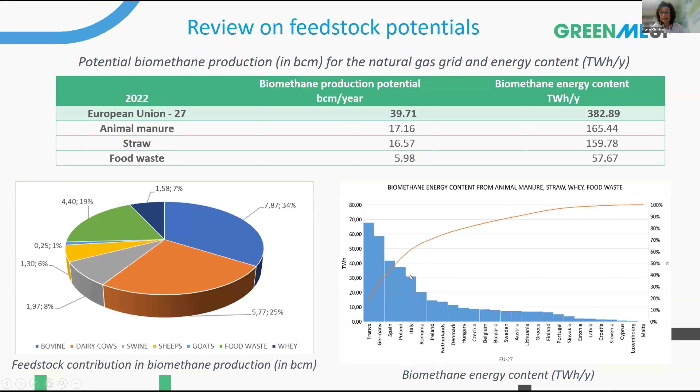Coming to the countries that are leading the way, first is France, that could produce something like near to 70 terawatt hours. Then follows Germany, and thereafter it's Spain, Poland, and Italy with the highest biomethane energy content.

The second objective is to evaluate those framework conditions in the target countries following the same methodology. First we had to identify and set up working teams in each country to be able to provide reliable data. Then we compile country reports on the production routes and uses, feedstock, and policy frameworks. That is already delivered, you will find it on our website. SWOT analyses are ongoing, and we are also starting the organization of business missions.

The third objective would be to actively engage stakeholders and the society, and have the societal acceptance. So, based on the stakeholders that we have identified in the previous work, we set up stakeholder hubs, something like working teams where people could come and provide their insights, but also take the results and use them in their own daily lives.

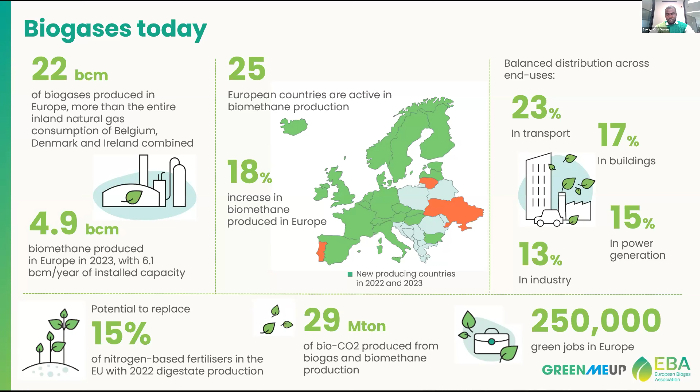But then again, with our figures, we also try to see beyond just EU 27. So in some cases, you see specifically for EU 27, and if not, then we are looking at the whole EU, more than the 27.

To date, we have the biggest growth in biomethane production year on year. As I mentioned earlier, there's 18% year on year growth in Europe, which is more or less 21% year on year growth even in EU27, reaching 4.9 BCM biomethane production within the EU27. And as I also mentioned, in the first quarter of 2024 already, we saw 6.1 BCM biomethane installed capacity. The countries leading this run are more or less Italy, France, Denmark, and the UK, and they are scaling up their biomethane production.

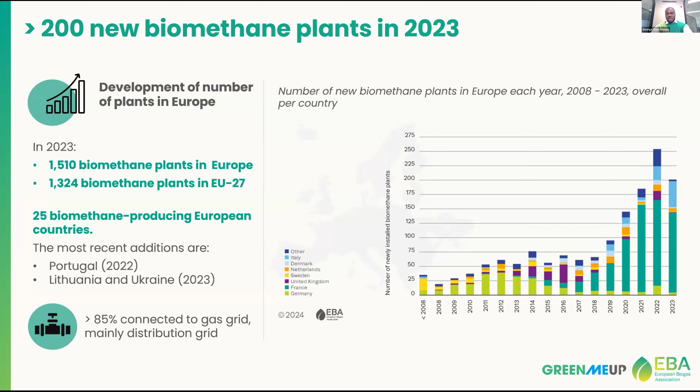In terms of end users, the biomethane being produced is used almost equally across all sectors, I would say. We still have quite a chunk unknown, which we keep updating, so the figure for 32% keeps getting smaller, but the majority goes into transport.

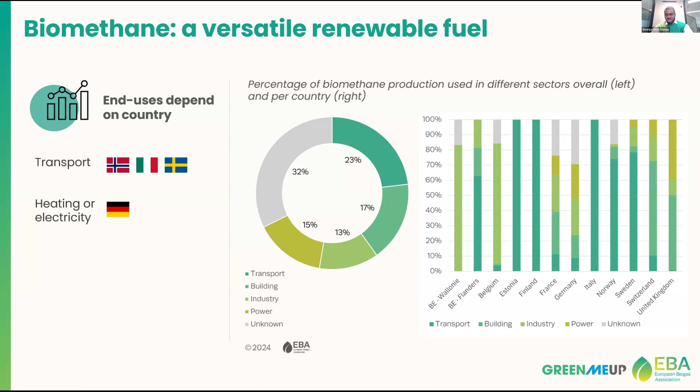Moving forward, we want to look at the potential of production. So now we've seen a bit of where we are currently, and then where we can get to in the next couple of years. There's already been a shift in terms of the new plants being produced, in terms of the main feedstocks being used.

We can also see that with this comes growth towards 2030. Currently, with studies done by other bodies, and also commitments made by member states through their NECPs, we can already see the projected growth.

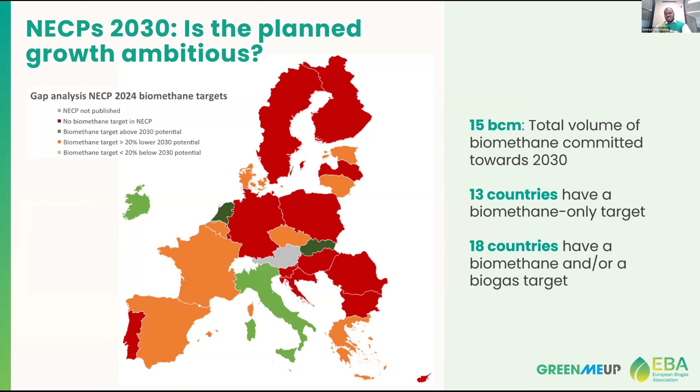However, towards 2040 we can also see there's still a lot of potential in terms of production. Within the EU 27 until 2050, we're looking at 151 BCM by 2050, coming from conventional anaerobic digestion and also thermal gasification.

We can already supply like 85% of the gaseous fuel demand in Europe, which will help us have a sustainable, secure energy production within the European market, balancing our needs and the challenges when it comes to waste management, emission mitigation, and affordability.

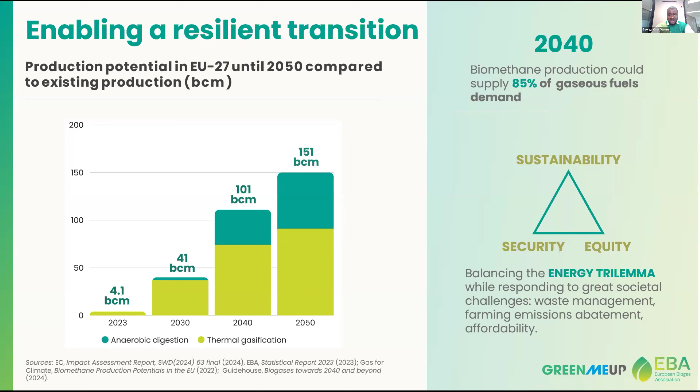Because whatever we are producing now is being used in Europe, we are not just solving waste issues, we are also providing other core products that can further be used in further production of biomethane, and even being used in other sectors such as agriculture—like digestates, for example.

And then there are other countries. As we have within the GreenMeUp project, we want to help countries like Latvia, Slovakia, Lithuania, and Estonia. The idea is to more or less transfer knowledge to some of these countries to build up their potential, so that at the end of the day, production across Europe increases for everyone.

So how then do we increase biomethane production? There are two major categories we'll look at: feedstocks and technologies. For feedstocks, we're looking at digestate from anaerobic digestion, which can be used to produce additional biomethane, either through hydrothermal gasification or pyrolysis in specific cases.

We're also talking about utilization of marginal and contaminated lands to produce bioenergy crops, avoiding competition with land use for actual food or feed production. And then we're also looking at seaweed, which we can invest in to bring up a sustainable feedstock for biomethane production.

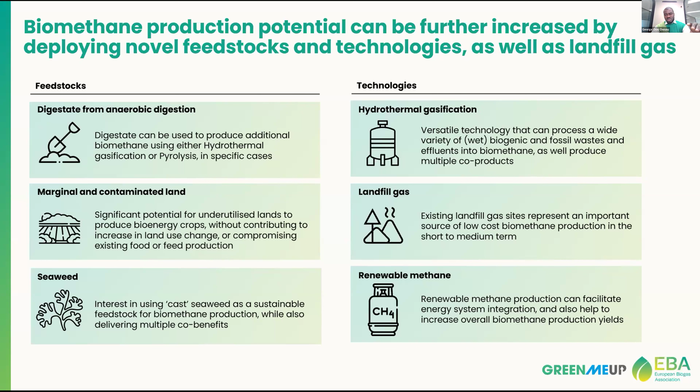So you can already see there is a lot of potential, and there's even more that we can do within Europe in terms of our action to increase our overall production.

Now, just to touch a bit on the methanation and then also on biogenic CO2 - these are the main points I'll talk on, and then we'll more or less have the end of this conversation for now.

Here we see that there's already an energy system integration where the biogas that we've produced can then be used again, helping to create a stronger connection between the electricity and gas grid - either using it for gas systems, for transport, or in the power system. What this solves is that excess renewable electricity can be stored in the gas grid in the form of e-methane, and you can also use it for hydrogen and biomethane production.

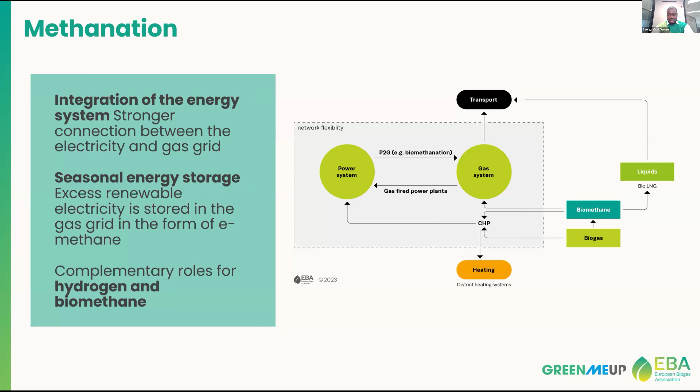Here we try to look at the state of the methane market, the e-methane market, mapping out the number of plants. We find that 10 European countries already have, or are expected to have, plants running by 2027, with growth expected in France, Finland, and Germany.

What's interesting is that you can already see a fast growing market in terms of the number of plants, right from 2015. Currently we're in 2025, and you can see the potential all the way to 2027. Most of them are coming from countries like Germany, France, and Finland.

These new plants are going to come in, and we're going to see the number of plants increasing. This also means additional production, with some 3,000 gigawatt hours of e-methane by 2027. In terms of production, it's even steeper than the number of plants increasing - currently we're around 20, but by 2024-2025 we should see around almost 500, and all the way to 2027 we see like 3,000 gigawatt hours.

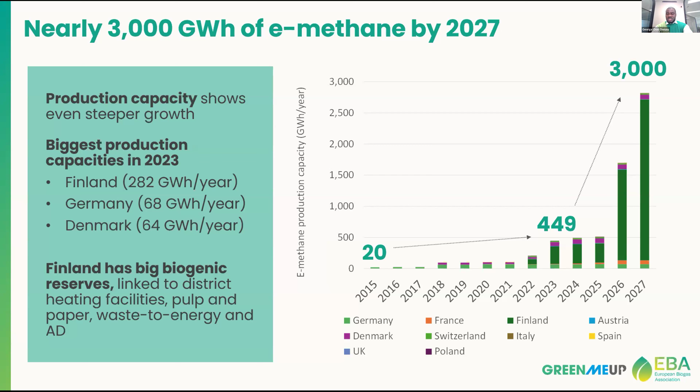Finland actually now has the biggest biogenic reserves, which is linked to their district heating facilities, and also waste to energy, as well as anaerobic digestion.

Then the next thing is biogenic CO2 - the potential that comes from biogenic CO2. Currently today we have 29 metric tons, but we can go all the way to 215. This will mean we're replacing fossil CO2 and making a more sustainable and circular alternative, leading to negative emission footprints, which is more or less not possible when doing it from fossil fuels.

Here the interesting thing is the end users for the biogenic CO2 we'll be able to produce, where we either use it directly or use it in a form of conversion. Whether you're using it directly for yield boosting in greenhouses, for heat transfer in refrigeration, as industrial solvents, in the food industry, or it comes under fuels where you're producing synthetic methane or biomethanol, or using it in the chemical industry, or even in building materials.

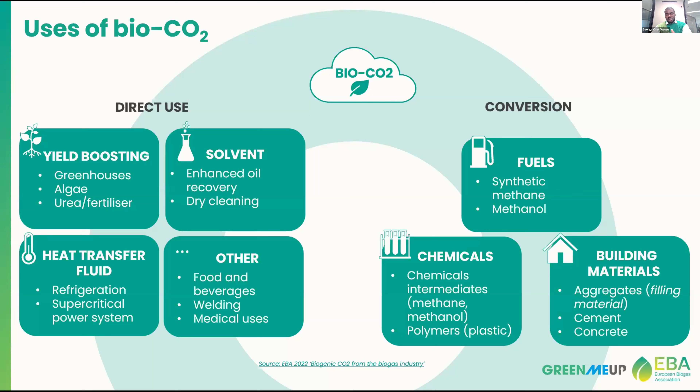So there's a vast potential to capture and use the biogenic CO2 that we produce as part of the biomethane production process.

Here we also try to see the plants and how the market is faring. But this work was started in 2023 at EBA, and the numbers we had at the time when we got this response seem to be a bit far lower than what's actually on the ground. So work is still in progress to update these numbers.

We already see that we identify 25 bio CO2 plants in Europe. But once we got further information regarding the plants, we can already project that there are about 67 already in Europe, producing way more than the 189 kilotons of biogenic CO2.

But then we can also see an additional 42 plants that are expected by 2027. And most of these plants are already using or are going to use agricultural residues, talking of the shift towards new feedstocks or more sustainable feedstocks. And then several countries are also now developing support schemes to promote carbon capture and utilization, and so you can already see that there's now also a growing demand for the use of CO2 even across Europe.

Now, finally, how to boost the scale up. And this will be my final slide, but I think Missini also touched this with some policy recommendations. So from an EU perspective, a more solid and consistent regulatory framework is going to be something that we'll need, to encourage sustainable biomethane production in compliance with RED III, with access to sustainable financing and the EU trading system, and also to facilitate the grid connection and cross-border trade for biomethane.

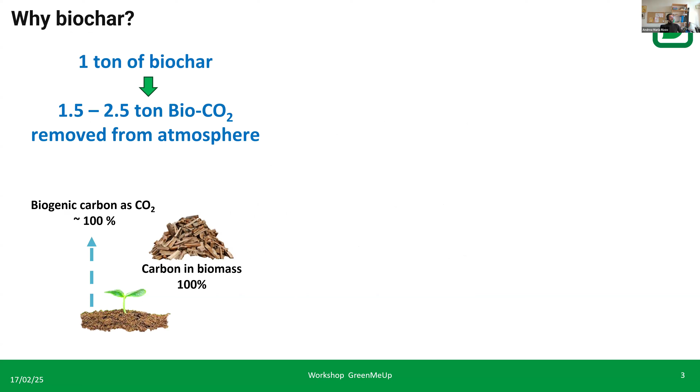So why biochar? First of all, we love biochar because, conversely from the labile carbon we find in biomasses, the process of pyrolysis produces this stable form of carbon, a long-lived form called inertinite. Now we have evidence from very long studies on its stability, and we can safely say that with this kind of process, approximately half of the carbon stored in the biomass can be transformed into a very long-lived form, and this can generate opportunities for carbon credit besides the opportunities that biochar has in the fertilizer space.

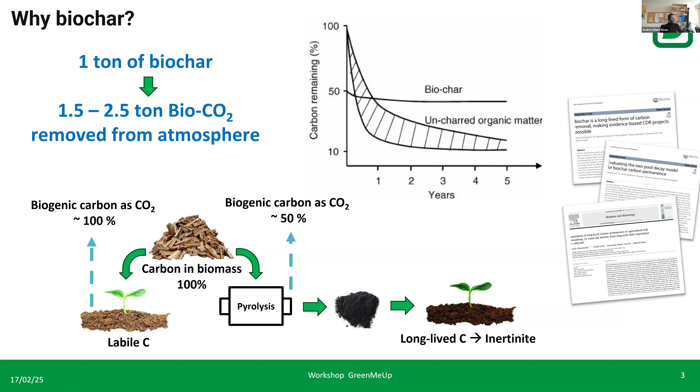Let's have a look now at the back-end integration of an anaerobic digestion system as we know it, and pyrolysis.

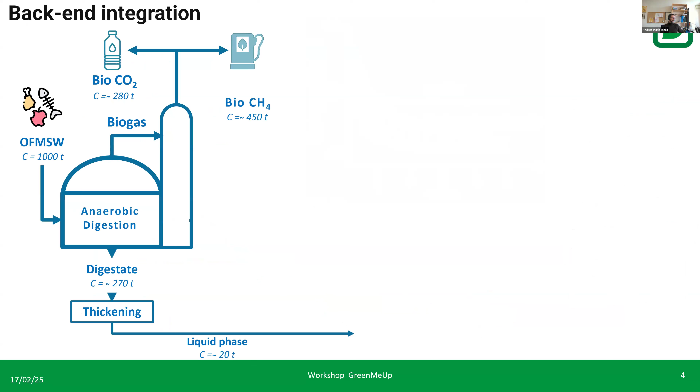So the digestate is normally thickened, separated into a liquid phase, which can be further stripped to produce ammonium sulfate. This is standard practice in many plants. And then we have our solid phase, the solid digestate, which per se, under appropriate conditions, can be component material category 5 under the fertilizer regulation, which is already a product.

But sometimes we add green waste to the stream. We go for composting and produce another kind of EU fertilizer, CMC3. Now, instead of going this route, which entails significant investment because you need a lot of space and time, processing time for composting can be in the tens of days.

Well, again, if we're still leveraging the addition of green waste, lignocellulosic biomasses for example, we go through drying and pyrolysis instead. We can combine the stripping section, because we can feed it also with the condensate stemming from the drying stage, and the solid product from drying can then be processed into slow pyrolysis.

This originates CO2 from the pyrolysis gas combustion and biochar, which is a European fertilizer under the delegated regulation 2021-2088, and per se is a CMC14.

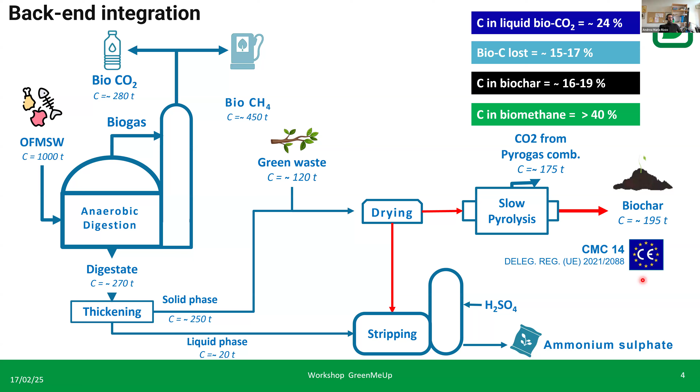Conversely, with biochar, under appropriate conditions, you can get up to 250 euro per ton. Besides, biochar opens up the possibility of carbon credits, which, as far as digestate is concerned, is not possible under that specific route.

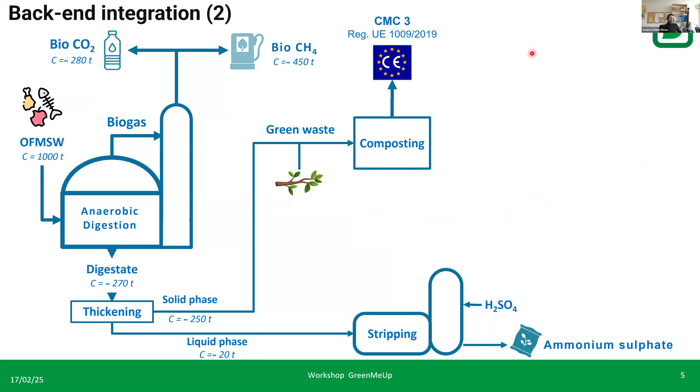But let's look at another kind of back-end integration with the pyrolysis system. If we look at the option where composting was part of the process flow diagram, with solid digestate co-composting along with green waste, we have the possibility to add more green waste and use a split stream of the solid phase, which undergoes the usual process and then passes through slow pyrolysis, originating again biochar and CO2 from pyrolysis gas combustion.

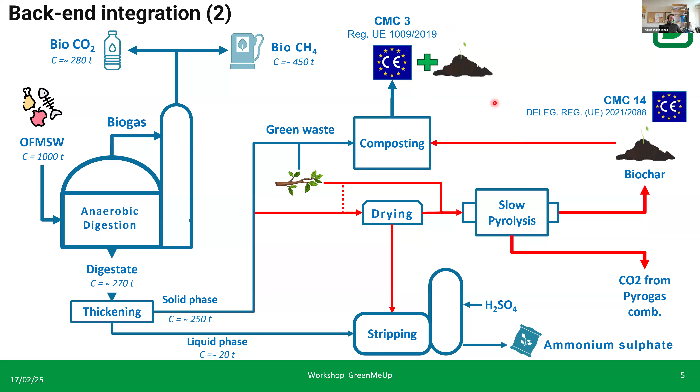So we have both products in this case, our CMC14 and our CMC3, but we also have the possibility to feed either part or all of the biochar produced to the composting plant, originating a biochar-added compost from the digestate, which has significant improvements in decreasing nitrogen emissions to the atmosphere during composting, enriching in stable solid carbon—contrary to the biochar's very stable carbon form, the CMC3—and speeding up the composting process, providing co-benefits to both systems.

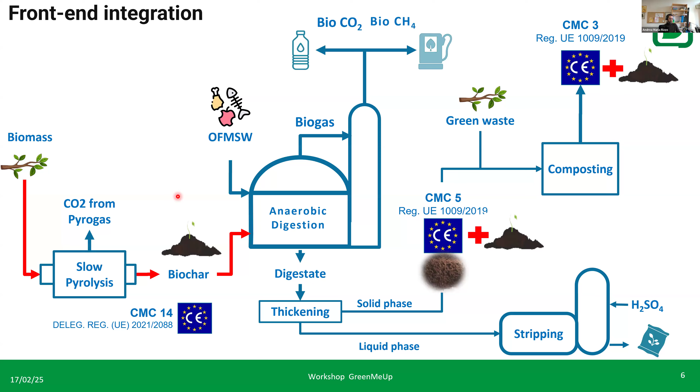Let's move on now to the case studies I was mentioning before, most notably this first one. This plant has been authorized in Italy, specifically in the Tuscany region, in 2024. It's the first of its kind in our country.

The project addresses the anaerobic digestion of roughly 40,000 tons of organic fraction of municipal solid waste, locally collected from separate collection—a very high quality product, but still affected by low appeal of the digestate produced—and some green waste. The plant is a conventional AD plant for biomethane production, and the biomethane will be fed to the local natural gas distribution network.

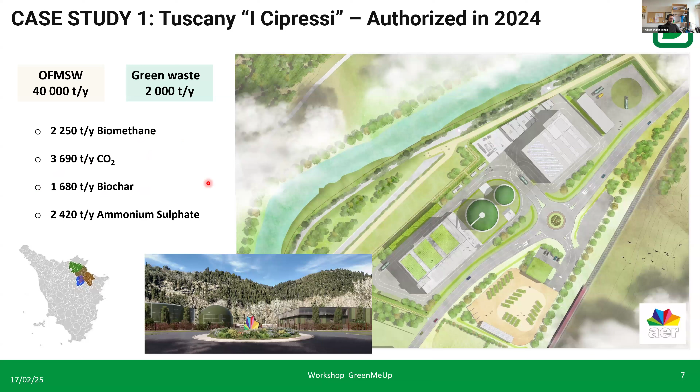CO2 will be separated and sold, and of course we will have also biochar production as mentioned, and ammonium sulfate. Now, a peculiarity of our country is that conversely from the straightforward schematic we saw before, in which after the drying stage we have a slow pyrolysis, the digestate, and green waste, and we produce the biochar out of it. We provide the heat for the process from combustion of the pyrolysis gas, which is standard practice when it comes to biomass. Being this specific plant processes waste material, bio-waste, as input...

National regulation in Italy requires that we do a thorough cleaning stage of the pyrolysis gases in order to avoid this stage of pyrogas oxidation being required to monitor emissions like an incineration plant. So it's a mandatory condition under our current legislative framework.

This requires that the pyrolysis gases are condensed before, separating the condensable part, which is sent to the wastewater treatment plant, whereas the permanent fraction of the pyrolysis gas, composed of CO, hydrogen, some methane, CO2, and other gases, is oxidated in a separate combustion chamber, and this stream provides the heat for the process. It seems a minor addition, just a small modification, but it's quite impacting when it comes to handling this product, which needs to be processed as a waste.

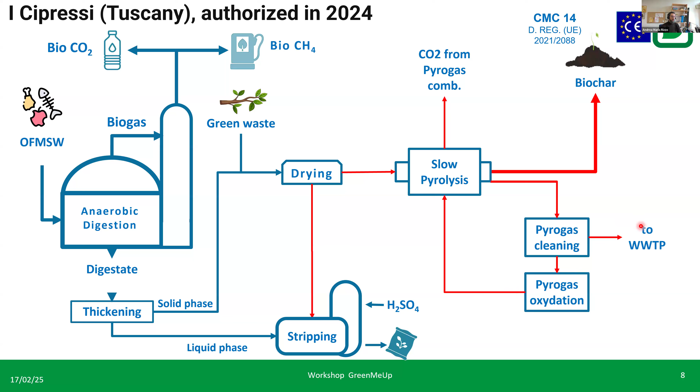The second example I'd like to bring to your attention deals with the island of Pantelleria, a small island closer to Africa than to mainland Italy. We have roughly 8,000 inhabitants on this island, but with a very big variation during the summer due to tourist influx. At present, the current scenario sees the island shipping all its bio-waste to mainland Sicily, having to deal with something like 7 hours of ship time to reach the main region.

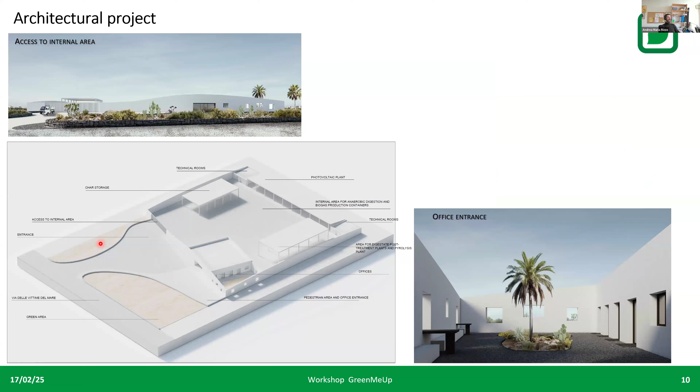In the context of Next Generation Europe, the municipality of Pantelleria secured funds to build its own organic fraction of municipal solid waste treatment plant, to be located on the island. We were contracted to produce the preliminary design for the construction of the facility.

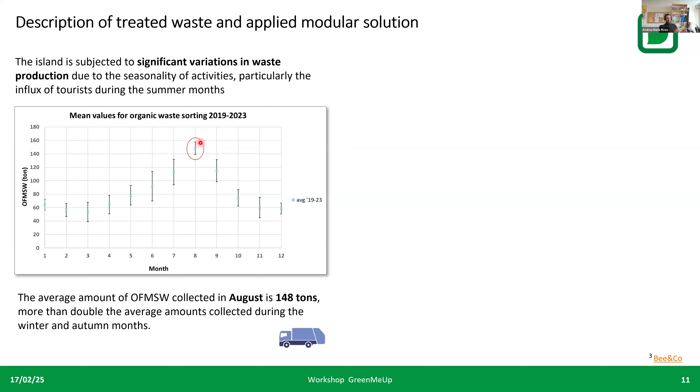This specific plant was quite a tricky case study to address, because the variation is such that in summer we have more than twice the baseline waste collection amount. Nonetheless, the plant is still a small one — roughly 1,000 to 1.2 thousand tons per year of waste. As you know, it's already difficult to make the economics work below 30,000 tons of bio-waste collected per year. This one was particularly challenging, but given the specific conditions of the present scenario, it's worth a shot.

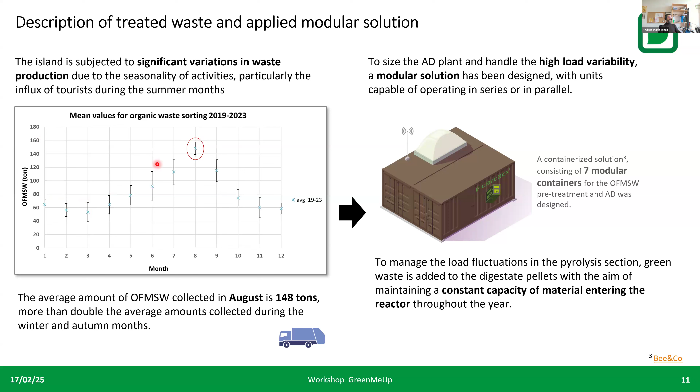In this specific case, we decided to use a very modular solution in which the reactor volume can be varied along the year to accommodate this large variation and manage fluctuations in the load on the pyrolysis section, which comes with this variable profile of bio-waste in-feed. We decided to make up this variation at the pyrolysis section with green waste, which is treated appropriately in increasing amounts during the valley of this curve, and in lower amounts during the peak season.

This specific pyrolysis unit is a small-scale one, a few tens of kilograms per hour, and it's an electric unit, along with the drying system. The drying is a heat recovery drying system, electrically driven, where the liquid is condensed after the evaporation step.

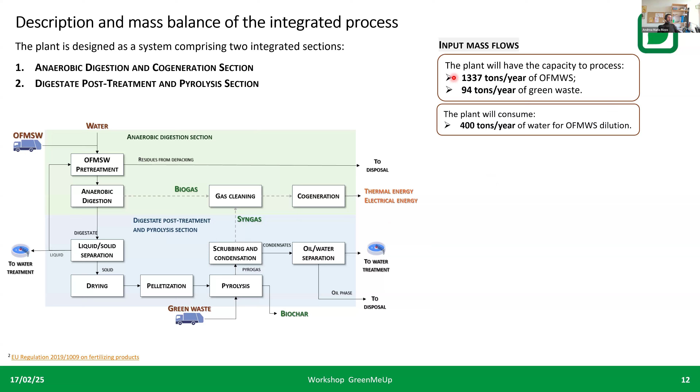So again, we have roughly 1.3 thousand tons per year of bio-waste, and approximately 100 tons per year of green waste. We will be producing roughly 300 tons per year of biogas and syngas, and something less than 100 tons per year of biochar, which will be used as soil amendment locally on the island of Pantelleria.

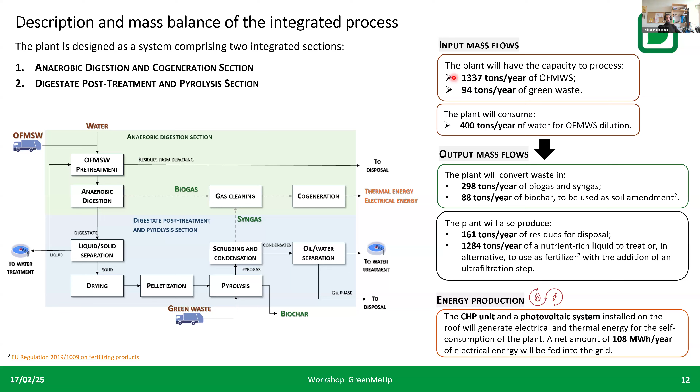The energy production in the system, we have a PV system that can combine with the CHP unit. The whole plant will be a net producer of electricity for the local grid, which at present is very polluting because it's not connected with the main Italian grid. So it's a standalone system operating on diesel fuel, and the whole island is powered by some cogenerators running on diesel. So it was a very important objective to make this waste treatment station self-sufficient and capable of producing a net amount of clean energy that can be delivered to the local grid.

Let's move on to the very last step of this short presentation. I'll mention the work that my colleague Leonardo Nibi is doing on bioenergy carbon capture and sequestration, and grid balancing, because in general biogas systems have the possibility to provide a platform for additional carbon capture and sequestration. Specifically, when we look at a typical biomethane plant, where we already have sizable CO2 production, normally we also have some cogeneration step, even if sometimes it's just to power the utilities of the system and cover the electricity demand from the plant itself - the self-consumption - which is sizable if we have a gas compression or cryogenic separation stage. In this cogeneration step, we will ultimately have some CO2 emitted as a result of the electricity generation.

Now, in a biogas plant, clearly this possibility can be leveraged to increase the share of CO2 at the output by treating also this exhaust stream coming from the CHP stage, along with the main CO2 stream coming from the separation of the biomethane from the biogas.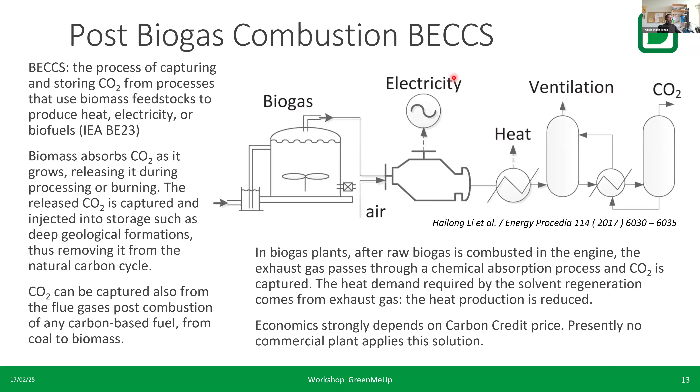Another option for which anaerobic digestion systems can be leveraged is the provision of grid balancing services, provided - and this is, let's say, a future-looking, forward-looking possibility. There are several potential areas of intervention, and I'm talking specifically about AD systems connected to CHP generators, which represent a sizable amount of power currently being produced in the EU.

Although there are some constraints, AD systems currently have the unique possibility that by having a certain amount of gas storage on site, they could potentially provide grid balancing services by pooling together multiple plants. If we look, for example, at the case of Italy, we have a very large number of plants operating up to 1 megawatt electric power, which is roughly 1/10 of what would be needed to provide effective grid balancing services.

But this is not an obstacle per se if we think of the possibility of having multiple 1 megawatt systems pooled together in a virtual power plant, thus providing the actual firepower to deliver this kind of service on the market.

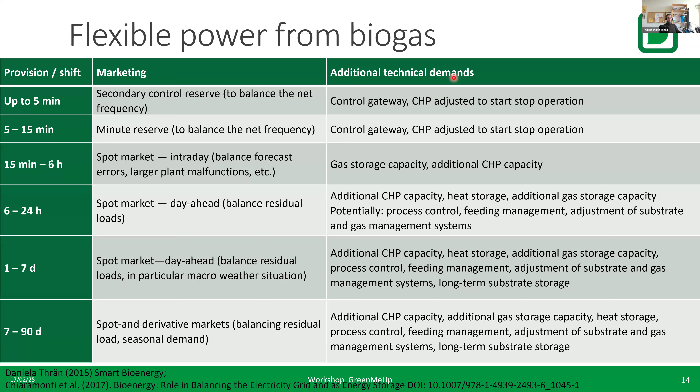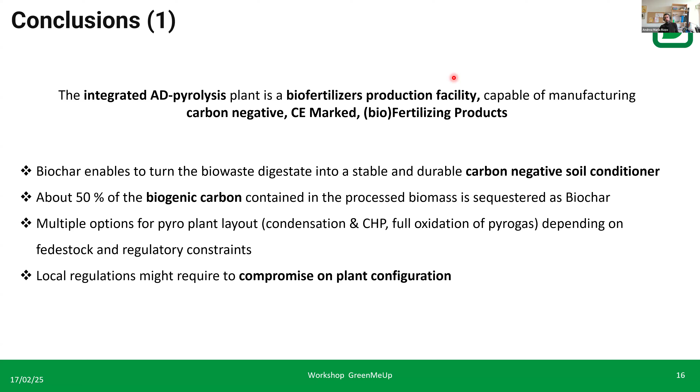There might be cases where local regulation requires compromising on plant configurations to abide by specific requirements. When added to the back end along with composting, biochar and a pyrolysis plant can reduce nitrogen emissions in the composting stage, increase composting speed and product quality, thus increasing value and reducing costs. When added to the back end instead of composting, the pyrolysis plant reduces the civil works of the whole plant, because you get rid of the composting stage, increasing the value of the product a lot.

Again, we're talking of 1 to 5 euro per ton for the digestate, up to 200 euro per ton for the biochar, and this opens up carbon sequestration opportunities. When added to the front end, you can improve the CH4 yield, thus increasing revenue, and produce a biochar-enhanced digestate or compost depending on plant configuration, thus increasing the value of the product itself.

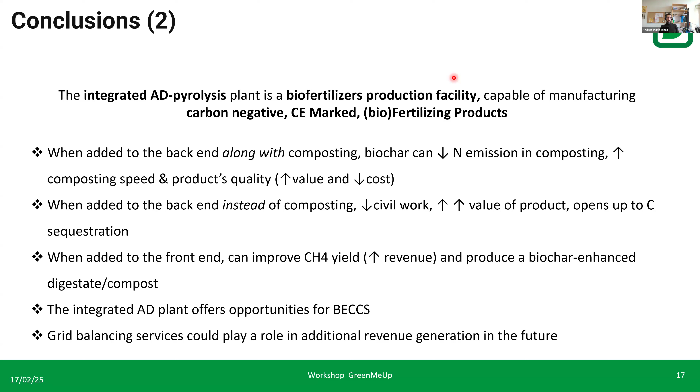The integrated anaerobic digestion plant offers opportunities for bioenergy carbon capture and sequestration, and of course grid balancing services could play a role in additional revenue generation in future scenarios. So thank you very much for your attention and for your time.

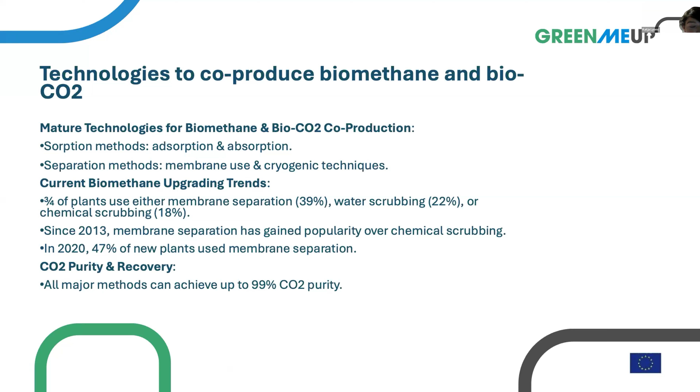Of course, it depends also on country regulations of CH4 concentration going to grid, and what technology we're using—PSA, water scrubbing, or amine-based technology—but they all have major features and can achieve up to 99% CO2 purity.

This slide shows that membrane separation has really ramped up, especially from 2013 onwards, even stronger. Cryogenic separation is very interesting, but is still a little bit energy intensive due to the refrigeration needs. But there are also some possibilities to make that more energy efficient.

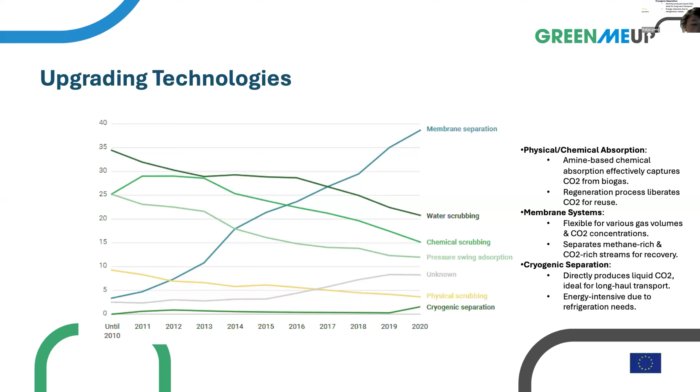The main advantages of biogenic CO2 separation in the upgrading process is that it has a premium image. The biogenic CO2 has a strong value chain compared to fossil-based—some markets up to $1,000 per ton of biogenic CO2. From the technical perspective it has high purity, more than 98%, meeting safety standards for food and beverage industries or for fuel technology.

So very low NH3 and H2S concentration, which is typically removed in the upgrading process or even prior to that with low-cost biological desulfurization, which happens in the reactor with injection of air or oxygen.

Then we definitely have economic advantage when we can locally produce it and co-locate these other add-ons and building blocks of fuel production to the AD plant and upgrading plant, to have all the important commodities as close as possible together. That means programmable production and secured supply options.

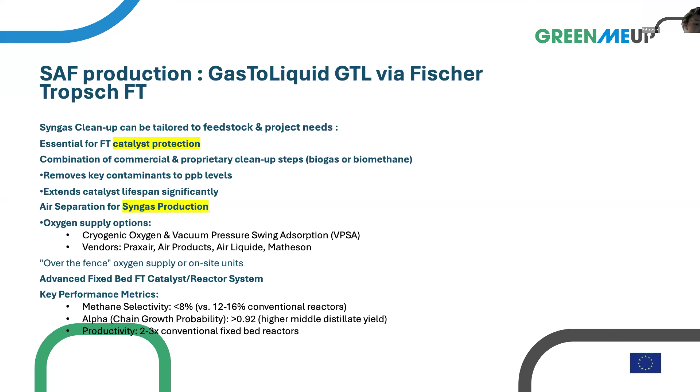Then normally you could technically just use the biomethane and add oxygen, and create, in the Fischer-Tropsch process with the catalysts and hydrocrackers, SAF or renewable diesel.

But you can make this more efficient and increase your yield output of SAF or renewable diesel if you use the separated CO2 in combination with hydrogen and send that into the same GTL trains to produce more SAF and diesel, almost by 50%.

So interesting is that this hydrogen would normally be created through electrolyzers. Maybe we can explain what we can do to make this more energy efficient.

There is a company in Austria doing green hydrogen plasma dissociation, which is an alternative to electrolyzers. This green hydrogen process is basically like a pyrolysis process in which we rely on renewable energy, which can be biomethane as a feedstock, and also biomethane as renewable power. It's cheaper and more efficient than conventional electrolyzers.

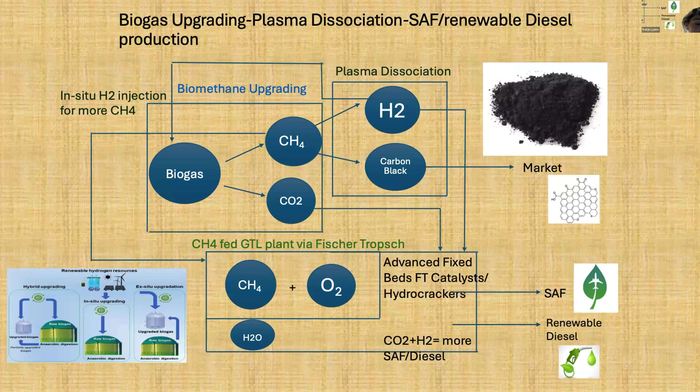At the same time, how is this done? It's a plasma arc that breaks the methane without combusting it entirely, avoiding CO2 emissions. Thermal energy is created, which has another use for other applications.

For example, it could be turned into cooling for the absorption process, if you need cooling for the CO2 that we initially separated from our upgrading process from the biogas.

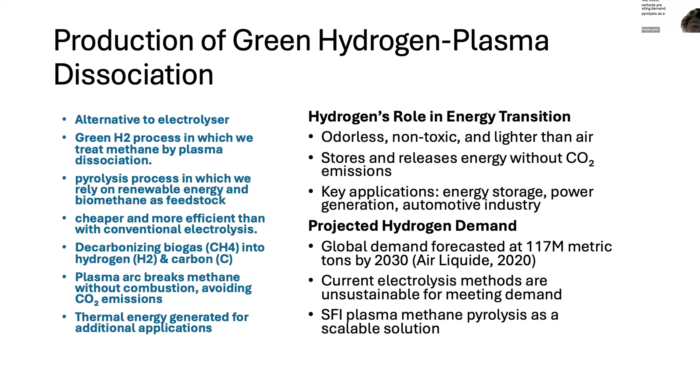Maybe what's interesting is that Air Liquide has forecasted a global demand of 117 million metric tons of hydrogen by 2030, and current electrolysis methods are really unsustainable for meeting this demand. So this could be an interesting and scalable solution.

Why? Because to produce 1 kilogram of hydrogen, with a caloric value of 33.3 kilowatt hours, electrolyzers require about 53 kilowatt hours of electricity. And this 1 kilogram of hydrogen, when converted back into electricity by means of a fuel cell, for example, yields 25 kilowatt hours of energy. So this is an energy loss of more than 53%.

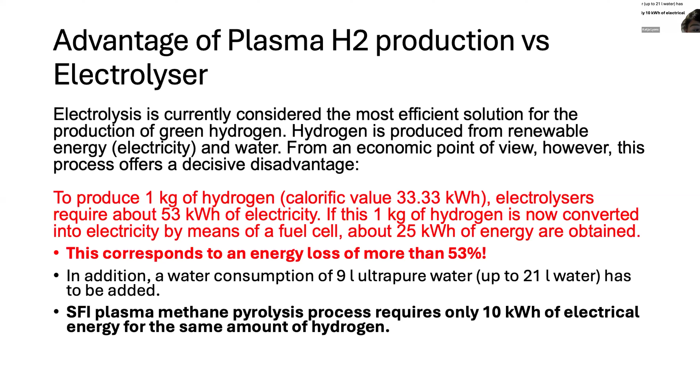Also, you need a lot of water consumption, from 9 liters up to 21 liters of water. This SFI plasma methane pyrolysis process requires only 10 kilowatt hours of electrical energy for the same amount of hydrogen produced. So this is very, very interesting.

So the key takeaway from the SAF production is that we can do GTL via the Fischer-Tropsch process. We can produce a direct drop-in fuel, which, with the European mandate starting from 2025, is at 2% as a blend-in fuel to fossil jet fuel, and by 2050 it will be up to 70%.

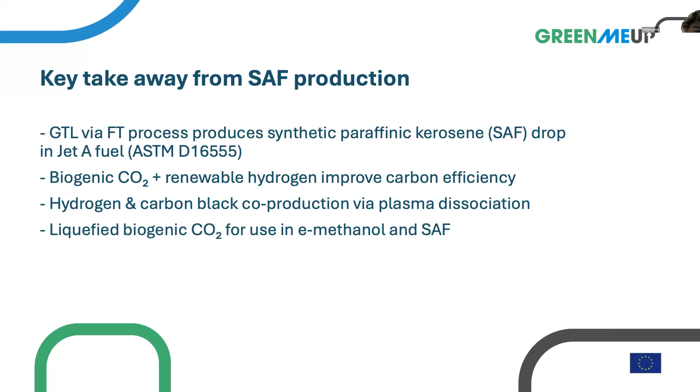So this is a very aggressive target, and in order to meet these targets, we need to be producing SAF better yesterday than tomorrow, and it's hard to do it with only the waste streams that are given. So what we can say here is that we have to look into the feedstocks.

It has been mentioned in a few presentations today that feedstocks, food waste, industrial organic waste, and energy crops will be interesting. Still untapped and unutilized is high lignocellulosic biomass - straw, husk, pulp. The challenges lie in these complex cell structures that require special pre-treatment, and also investment in tailored equipment for these co-digestion techniques.

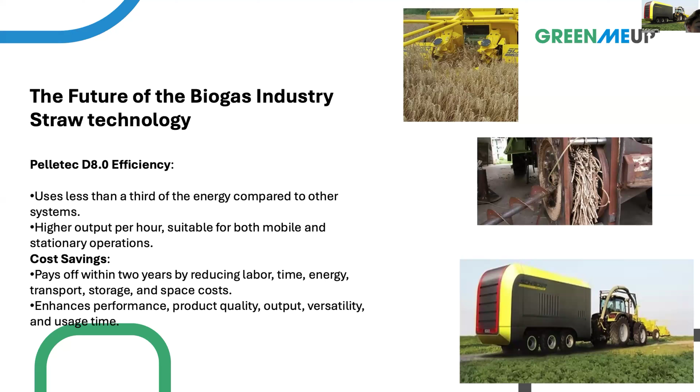This is an example from the farming perspective - Pelletec, an Austrian company, Scheider. They have a mobile extruder, a mobile pelletizer. It uses less than a third of the energy compared to other systems, has a high output per hour for both mobile and stationary operations, and can pay off within 2 years by reducing labor, time, energy, transport, storage, and space costs.

What it does is go through the field and harvest all the straw. In mobile operation mode, it sucks in all the straw and extrudes it, so there's a mechanical and thermal treatment process happening.

The interesting thing is that when you process about 8 tons per hour of straw, depending on material, what comes out are pellets that can be readily used as a feedstock in AD plants without any further treatment. It has been denatured through this thermal process and broken up this lignocellulosic structure, which is extremely interesting when you consider straw normally has retention times over 90 days in an AD plant, while these pellets - this processed straw - just have a retention time of 40 days.

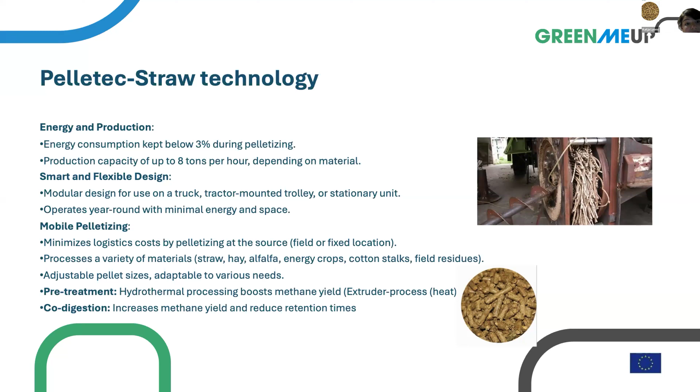This makes it really interesting if you mix it with other feedstocks. For example, if you have chicken manure, a high nitrogen based feedstock that needs buffering with carbon, you can add this without compromising on retention time, actually configuring your C:N ratio in a proper and efficient way according to your reactor design.

This is where Biogest has its strongest horse, which I would say is the power ring - a ring-in-ring reactor type that has the ability to treat very high dry matter content. So straw technology integrated is interesting here.

Other ways to increase efficiency is the nutrient availability - so pH and the C:N ratio, as I mentioned already, all in combination with the mixing.

Every feedstock that gets mixed into this power ring basically gets introduced and inoculated with the old feedstock and with the bacteria, with the microbiome of the digestate and of the feedstocks inside within 5 minutes. So there's a very high degradation of organic matter, and therefore we can reduce organic loading rates.

Then we also have advanced pre-treatment techniques for feedstock utilization - not only thermal, as with this pelletizer, or mechanical, which we would normally achieve with disintegrators or hammer mills, but also enzymatic pre-treatment, which is very interesting especially when we work with a very conventional feedstock like silage.

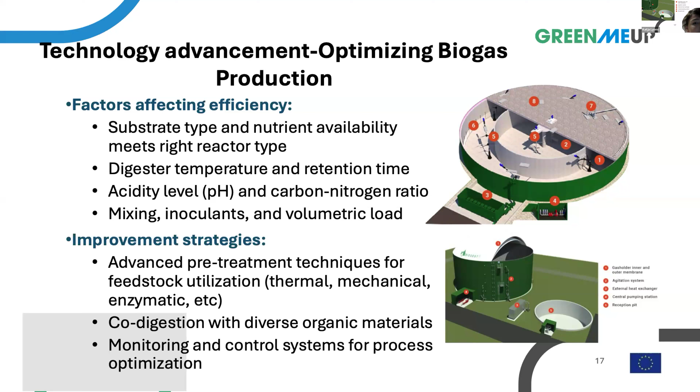We heard already that this integration of sequential crops and energy crops will play a major role, along with agricultural residues, to make them ready to be used. From 2030 to 2050 onwards, 50% of this feedstock supply will be derived from sustainable cropping systems.

That's why it's so important to really work on the agronomy side and work on how we can integrate this and create circular economy farming, and make keystone systems for food and fuel supply that can happen simultaneously.

It is really important that we can keep soil health and nutrient integrity of plant root soil systems happy. Also by doing this, the big advantage is looking at intercropping. Why intercropping? Because we are looking at different plants that can actually benefit each other, like synergetic plants, not only from the plant system, but basically from the root systems.

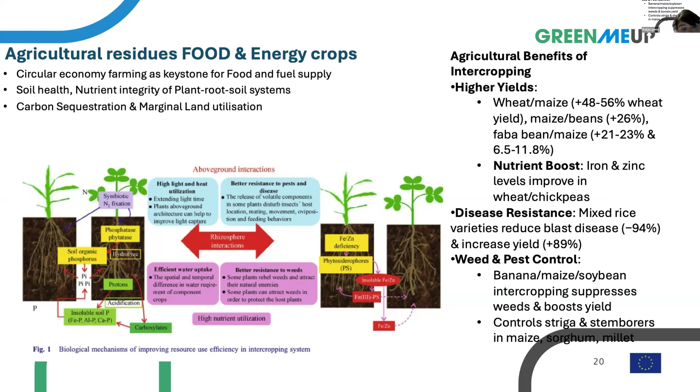And not only in this way, but most important is that we cover the ground 365 days a year. This biogas done right concept has already shown that this is important, so that we don't have carbon dioxide emissions or NOx emissions going up after a tilling event when seeds are not directly put into the ground.

So what is important, in order to really create this soil health, is we need to understand the carbon sequestration potential of plants and the timing and rhythm of the land and the farming practice.

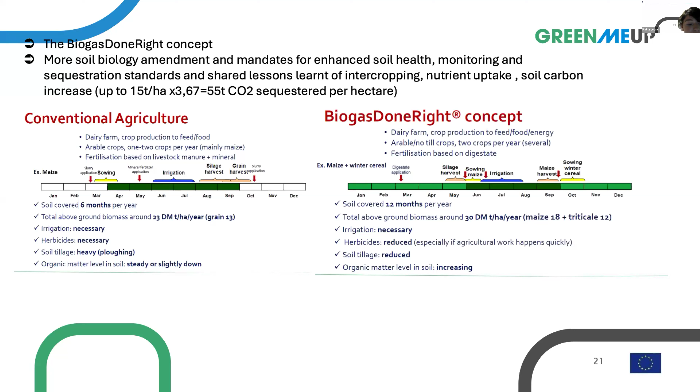These are the most crucial parts that we need to work on globally, and to create incentives to enhance the productivity of marginal land and rehabilitation of land. It's still not enough focus on that, because if you look at the agricultural systems still going on in most parts of the world, we're very far away from that.

And it can be shown that we can actually create very high nutrient-dense food crops simultaneously with energy crops. Sometimes you have 4, 5, 6, 7, up to 12 different species growing within one farmland throughout the year, and all this contributes to soil health, root health, and resilience of plants.

So my conclusions here today are: waste-to-energy projects will definitely be explored to their full potential to contribute to green fuel production and carbon sequestration. But these European SAF mandates and global SAF mandates will rely on countries with abundant land, ensuring scalability and sustainability in meeting these targets, especially by maximizing the use of marginal and abandoned land for energy crop cultivation. This is crucial to meeting these targets, to creating carbon sinks by integrating energy crop cultivation with food crops, and to increasing land productivity with carbon capture.

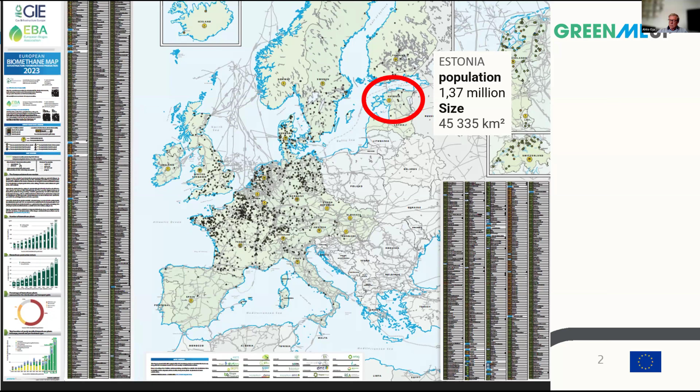A very short overview of history showing why Estonia now has 8 biomethane plants and 12 biogas plants. We really started building the sector almost 25 years ago when the first sewage plants were built in Estonia, just for biogas and to purify municipal sewage sludge. Also, the first consulting companies were established, and the Estonian Biogas Association was established in 2009, being one of the founding associations of the European Biogas Association. We also had a successful knowledge transfer from the EU Intelligent Energy Europe project Gas Highway, where the best European knowledge at that time was transferred to Estonia.

I would say we really saw in practice how the knowledge transfer succeeded in changing the mindset of the audience, the public, and also decision makers and ministry people, who said at the final conference in 2012 that biomethane is a very good domestic renewable transport fuel. And once we have the obligation to get renewable fuels into transport, biomethane fits very, very well to that objective.

And that's the reason in the next years the biomethane development targets were included in the long-term energy plans, and the structural funds in the energy sector started to be used for the biogas sector development. Nowadays we'll see shortly how it goes. The Estonian Biogas Association is a partner of the GreenMeUp project nowadays.

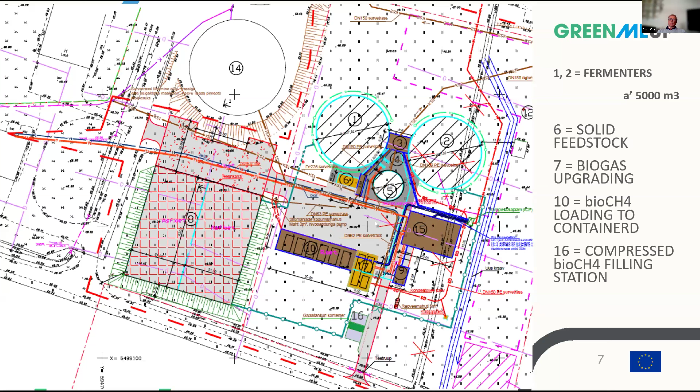And in this place, I want to share one of the lessons. You see this gray area in front of number 6, which is the solid feedstock feeder, and all this rainwater that comes down here is considered by environmental authorities as polluted industrial water. It was very close that they started to demand purification of this rainwater. That was one of the lessons I learned—that actually this solid feeder is good to build under a roof, so it doesn't touch the rainwater if something drops around it. But at that time it was open, and now we just have to clean it almost after every feeding, to not let some solid feedstock dropped during loading get drained off by rainwater. So that's one of the lessons.

So that's the drone photo of the plant. You see number 1 and 2, the fermenters. The liquid storages of digestate are managed by the farm. And that's the workshop office. The blue containers are the upgrading units, and that's the containers loading post with 3 posts for 6 containers, and solid feedstock. And you see the farm for dairy cows.

So I just want to keep to the time limits for the lessons. Before even the farm started to build, we were involved in the process because we are the same owners, 90% of the plant. So we said that once they plan the farm building, the disinfective substances, for example from cleaning the milk processing part, can't go directly to the slurry and to the biogas plant, and therefore it's separated so these disinfective substances go directly to the liquid digestate storage and don't come to the biogas plant, because they kill bacteria and have an inhibiting impact on biogas production.

So the second lesson, also from planning and building, was to keep the cold and warm maintenance rooms separate, which we didn't do—meaning that for this -30 degree climate, we kept all the pumps inside the pumping room, and the electrical cabinet was in the same pumping room. The pumps create heat, and the electrical cabinet also creates heat, which needs cooling. So it was like double—we had to cool down the whole pumping room, and sometimes we heated it with pumps. That was a very minor thing, but in practical terms quite important—just don't make your life harder by yourself.

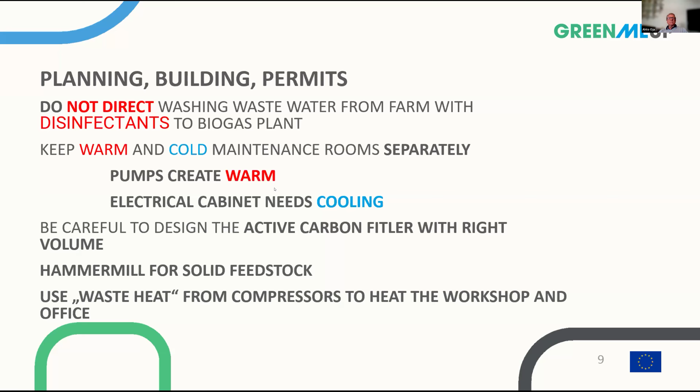And that's also to keep the heat inside the digesters. On the right hand side, with wood chips we heat the whole digester through one pump. We don't have pipes on the walls, so the heat exchanger is outside, and with 70 degree wood chip hot water we heat the feedstock inside the digesters.

On the left hand side, we take even more - we take the heat before we pump the digestate to the storages outside. We take up to 10, maximum 20 degrees of heat out of that, and use it for heating before the cold digestate is injected into the fermenter. So we just try to keep the warm in the fermenter and not heat everything from the beginning.

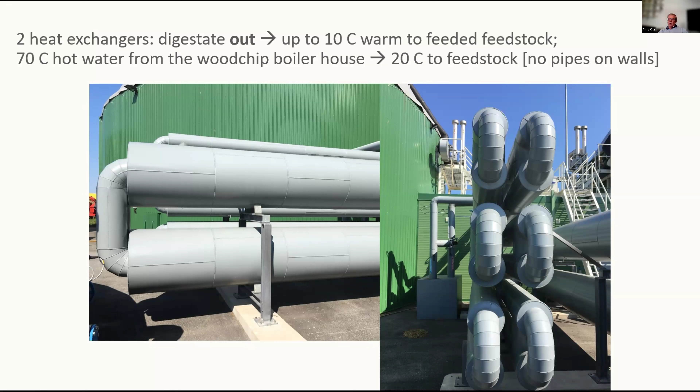The feedstock we use is close to 20,000 tons of slurry at 6.6% dry matter, up to 5,000 tons of solid manure, and depending on availability, 1,000 to 5,000 tons of grassy biomass and residues. The hourly production was originally planned at 150 cubic meters per hour, but currently it's close to 200, which is the maximum of our upgrading capacity - we have membrane upgrading running almost at maximum now. Yearly production is 1.5 million normal cubic meters of biomethane.

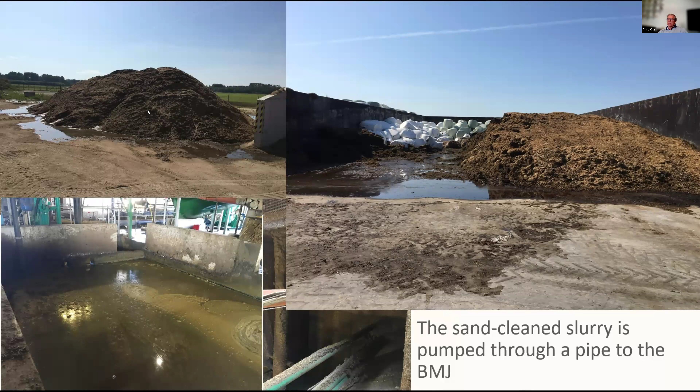You see the pictures of solid feedstock and liquid being pumped. Also there was one characteristic - the farm has sand bedding, so they reuse the sand. Before pumping the slurry out, they wash out the sand and reuse it, so we get the slurry almost without sand, though some still gets through.

Lessons on feedstock - of course you have to ensure and guarantee stability and quality always. We had problems with rocks, plastics, rubbers, and tires - the biggest stones were like 3 human heads in size. This really destroys the screws, conveyors and other equipment, so it's very important that feedstock is qualitative without any physical contaminants.

Then there's the origin of the feedstock - it's not a problem if you only digest agricultural manure and solid manure. But if you start using, for example, vegetables or potatoes not sold by shops but still potatoes, the environmental authorities consider these 10 tons of potatoes as waste. Once you inject this 10 tons out of however many 100,000 tons per year you digest, which is considered waste by legal acts, automatically in Estonia the environmental authorities say the digestate is 100% waste, which demands a waste permit for the biogas plant.

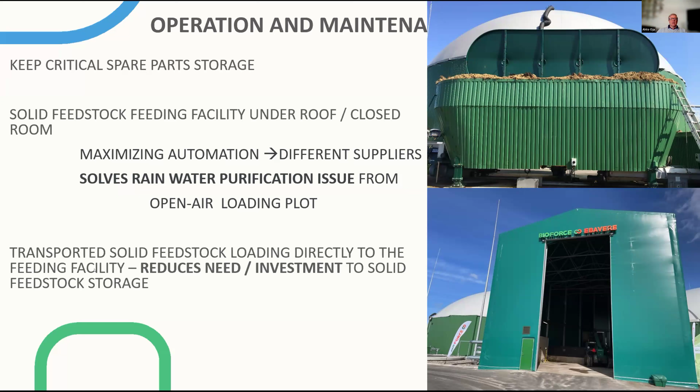This is the hammer mill we installed to get additional solid feedstock in. Later we installed a gas chromatograph because we built a filling station right beside it - the gas companies demanded it according to regulations, and we agreed. That's also the reason we spared putting a gas chromatograph at other consumption points like the injection point or other filling stations, because the gas is the same - under 250 bar, the quality can't change anymore after compressing it. So we installed it later than originally planned. If the gas quality is non-quality, it goes to a feedback loop, but since the membrane maintains quality, we keep the raw biogas quality in level.

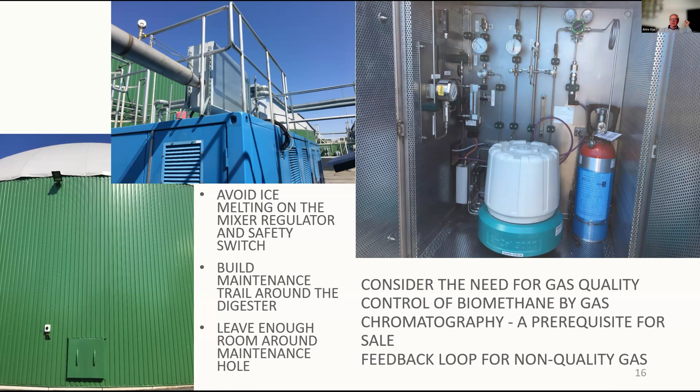So I've never actually used this feedback quality loop. Another practical thing is with the outside switches or mixer levels - in winter time, ice comes down and they get very icy, covered so you can't switch them. So it's good to keep in mind that in our cold climate, ice can cause damage, and you have to protect your switches and mixer regulators from that.

And that's just the filling station just beside. And then the first 100% compressed biomethane filling station in the Baltics started operation in 2018. And we had also some innovations.

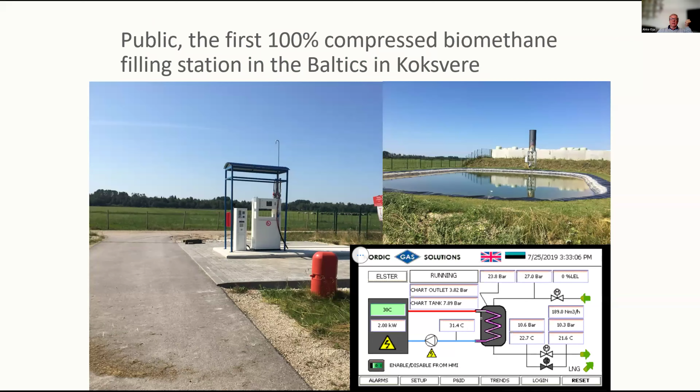We installed a 250 kilowatt nominal solar panel electrical system, which is our maximum. So in the midday of summer, 100% of electricity is produced by the sun.

We also installed the first mobile autonomous compressed biomethane filling station in this city. We also tested this solid oxide fuel cell, invented in Estonia by Elcogen and put together by the Finnish company Convion, and it's still working since 2020, with high 25% heating and 60% electrical efficiency, with a nominal capacity of 60 kilowatts.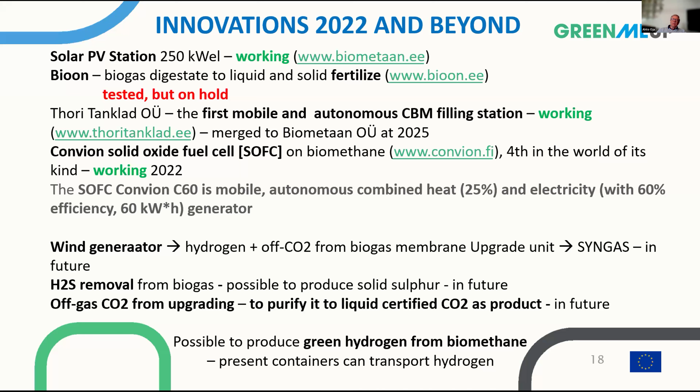We have several times designed and made feasibility calculations to use the CO2 off-gas from the upgrading membrane, to purify it and sell a CO2 product. Or, as we heard today, maybe think further and do something else with the CO2 - but the ideas have been there. And of course, the last thing you can think about is clean hydrogen from biomethane, but the efficiency is quite small.

Thank you very much. I think that's all from my side.